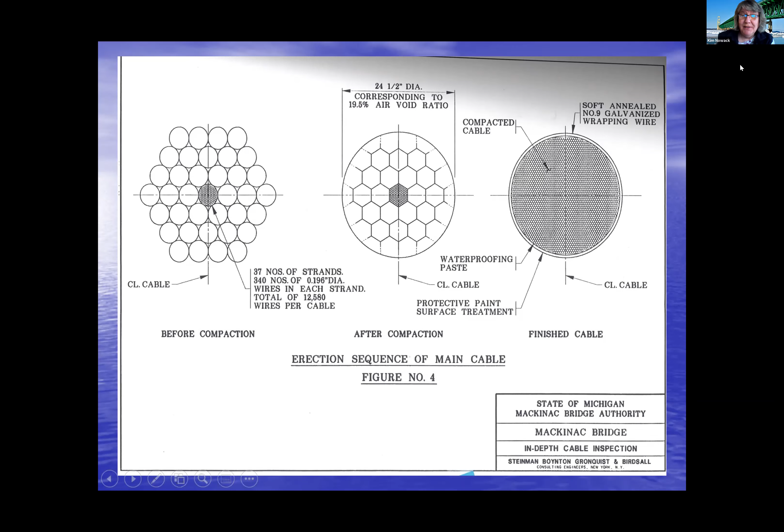I'll show you how the main cable system is constructed there. This is a cross-sectional picture of the main cable. And you can see that it is made of thousands of parallel wires that are put into bundles and then squeezed into a circular shape. So this shows how those bundles were made, and then it was squeezed into a uniform circular shape. So there's 12,580 parallel wires in the main cable that are doing all that heavy lifting of the roadway.

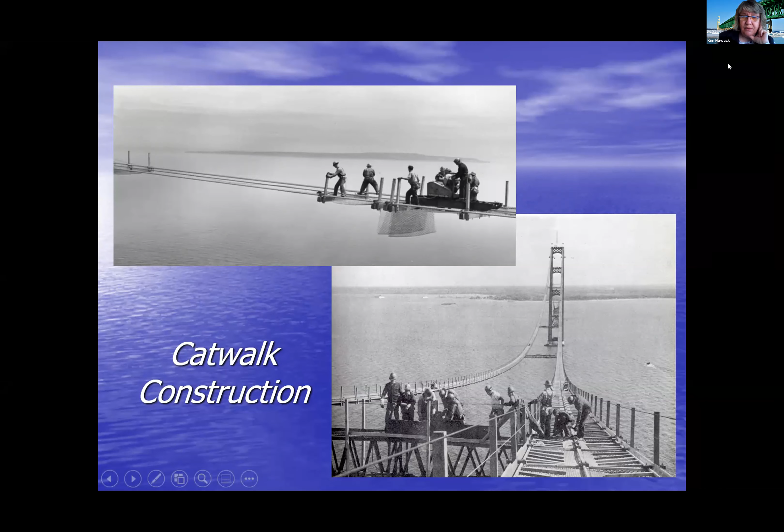And then the other picture shows it already in position, and they're using it. They're walking on the chain link fence. They have some railing erected, trusses side to side, so it helps with swaying, and so they could get from one side to the other without going up and down on the tower. So that's the work platform, getting ready to do the work of spinning the main cable.

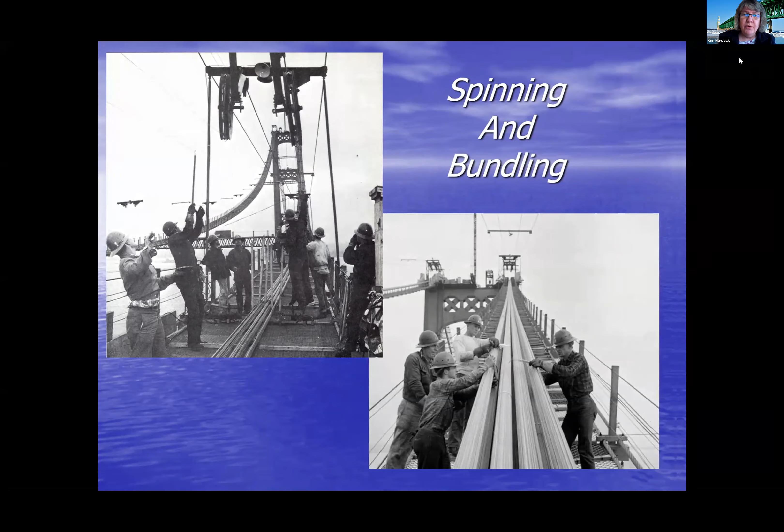And so you can see this gentleman here, he's reaching up to grab that piece of wire that's going past his workstation, and he's going to bring it down into the slots there and start forming the bundles. As you can see in this other picture here, the bundles were then squeezed together to form the uniform cable. And that's what's happening in this picture here.

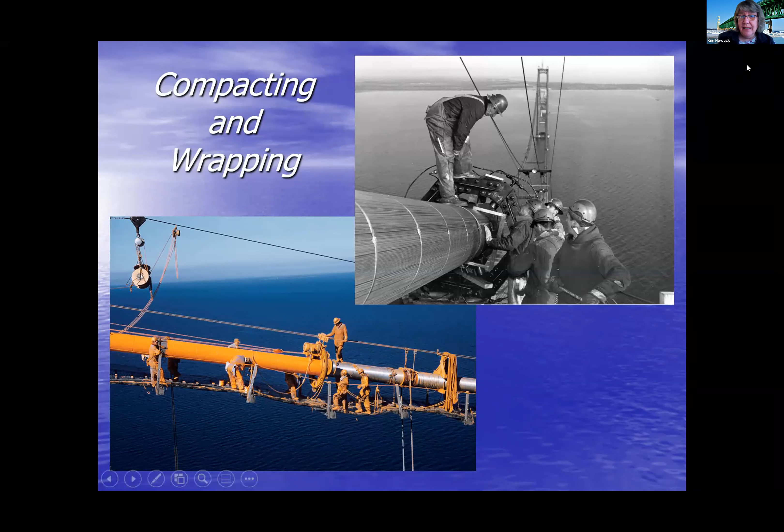But as you can see from those men that are in their blue coveralls that are all orange, they were basically swimming in that lead paste. So there's another thing that was perfectly legal at the time. For safety requirements, nobody really knew about the hazards of lead. So you can see how safety rules have changed a lot in those years.

So I see David Steinman is in the lead here by quite a bit. And so that would be correct. David Steinman was the designer of the Mackinac Bridge. And those of you that are joining us that are already graduated and perhaps have professional engineering licenses, put a PE after your name. You'll be interested to know that David Steinman was instrumental in causing that to happen. He was a firm proponent of licensing for civil engineers in general, and he was the first president of the National Society of Professional Engineers. And so we owe our professional engineering license in part to David Steinman.

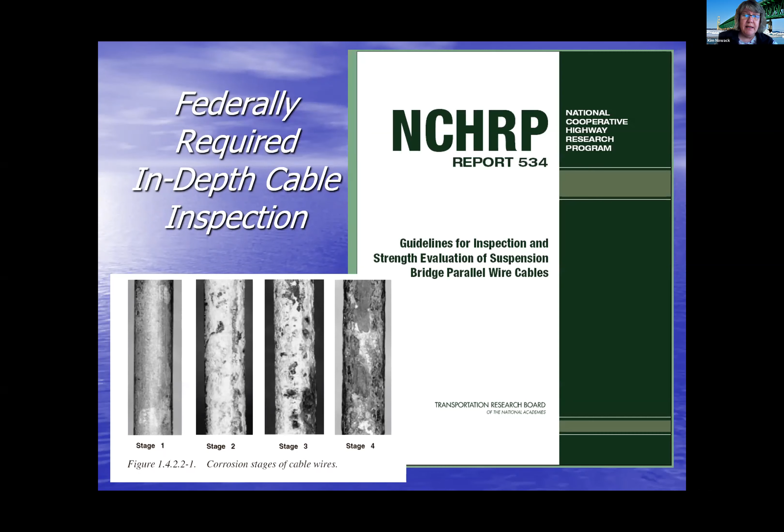So in order to keep the main cable and the suspension system in good condition, we have to do inspections. And so it's a federally required inspection that we do where we test random areas of the main cable. We have to actually open it up and see what's going on the inside. We look at the outside every year, but we have to look at the inside. So we follow this NCHRP report to give us the guidelines for doing the cable inspection. And what we're looking for basically is the stages of corrosion that the wires might be exhibiting in there. So you see the 4 different stages of corrosion that we're looking for when we open it up.

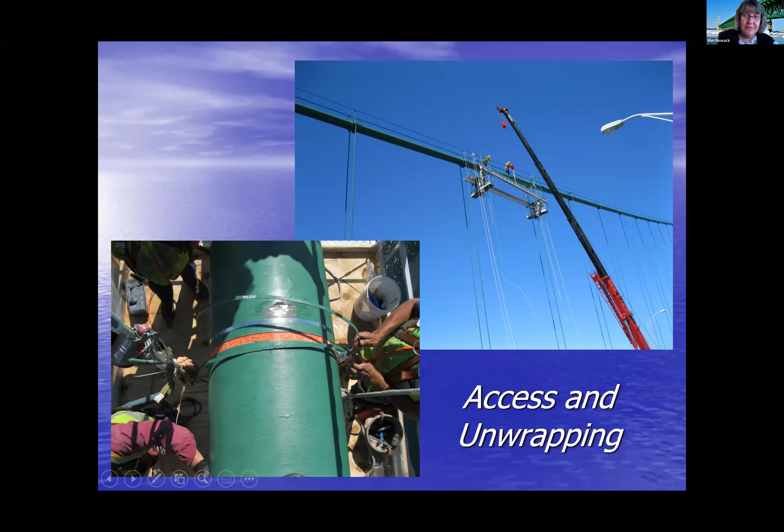So we have to take that wrapping wire off of there, and that's what they're doing in the other picture here. They've soldered some pieces together so it doesn't just uncoil on them, and they're starting to take the wrapping wire off, and there is that orange paste right underneath there, right where we left it 60 some years ago. So once we get it unwrapped, we have to look to the very center of the main cable.

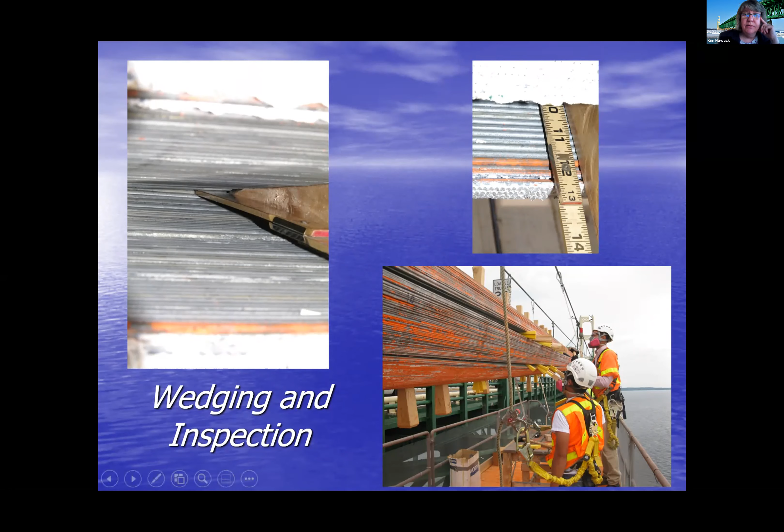This is typically what we see inside there, nice bright shiny wires, a little bit of corrosion on the very outer wires, but all in all, we've always seen very good results inside. And then we have to put it back together the same way they did 60 some years ago.

And then we put wrapping wire back on, and we may want to use the lead paste because it does such a good job, but for environment and health hazards, we don't want to use it. So we use a paste now that has zinc in it. So that does the same thing that the lead did in the corrosion process, and keeps the main wires from corroding, because those are the ones that are doing all the heavy lifting.

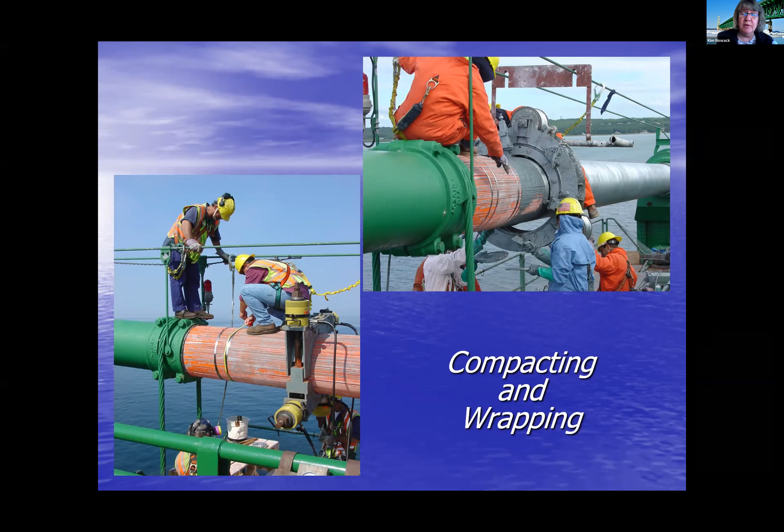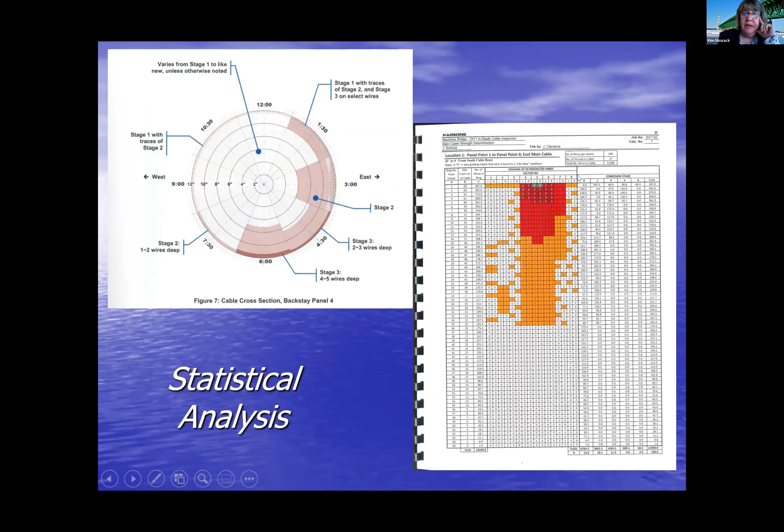And then this is a different way of looking at it. You have each of the rings of the cable laid out there, and the different levels of corrosion are shown in there so that they can take that and they can do a lot of mathematical gymnastics there in order to get the results, along with some wire testing. I didn't mention the wire testing.

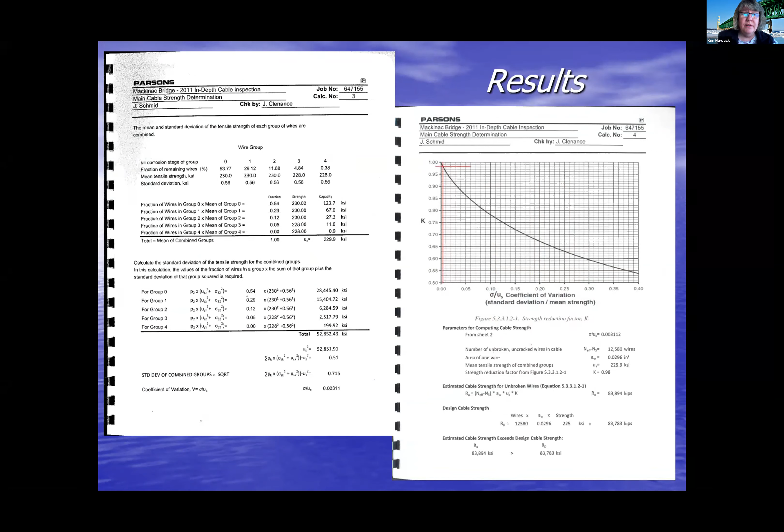They actually take out a piece of wire from the main cable so that they can test what the actual tensile strength is at the time. And so using those numbers, they end up with results that typically show that our cable strength exceeds the design cable strength. And so we have been very happy with our results from the main cable inspections.

We'll have some more coming up in future years as federal guidelines change and as we need to keep up with those inspections. So this talk about main cable inspection can usually take an hour, but I crammed it down into my 10-minute allotment here.

All right, thank you, Kim. I'm just so excited to be able to present with Kim. You know, I've got literally a Wonder Woman poster, and I got the Kim Nowack superhero poster. She's just been such a role model for me as a woman civil engineer, and I'm just super grateful anytime I get to spend time with her. So thanks, Kim. It's always such a hard act to follow. How come I always have to present after you?

First of all, I just want to say, again, my name is Amy, and I perform bridge safety inspections to ensure the safety of the public. So, you know, you should never question the safety of a bridge when you cross it, including the Mackinac Bridge.

You know, it's inspected routinely, both above and below water, by qualified civil engineers and qualified divers. So let's dive right into a very critical component of the Mackinac Bridge, and that's the foundation. Many people never even think about the piers when they drive over a bridge, with the exception of the tower piers. The rest of the piers are out of sight. If, however, you've been lucky enough to travel to Mackinac Island by ferry, you can look to your left or your right and see the elevation of the bridge and all the quantity of the piers

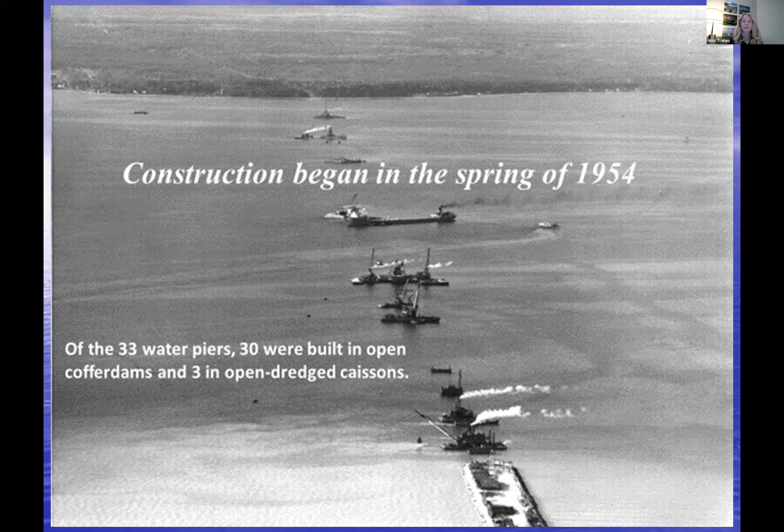that actually support the Mackinac Bridge. Specifically, there's 33 water piers, 30 of which were built in open cofferdams, and 3 were built in dredged caissons. This black and white slide shows the beginning of construction, and it all starts with the bottom and goes up, right? Foundation started in the spring of 1954. Of the 33 piers, the most recognizable and most photogenic are the two tower piers, and that's what I'm going to talk about this evening. The tower piers soar to a height of 550 feet above the water surface, and they plunge down at least 140 feet to the strait's bottom.

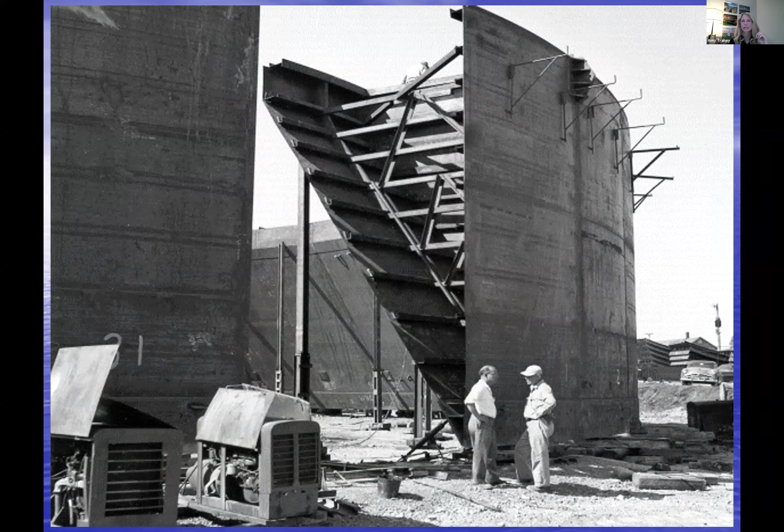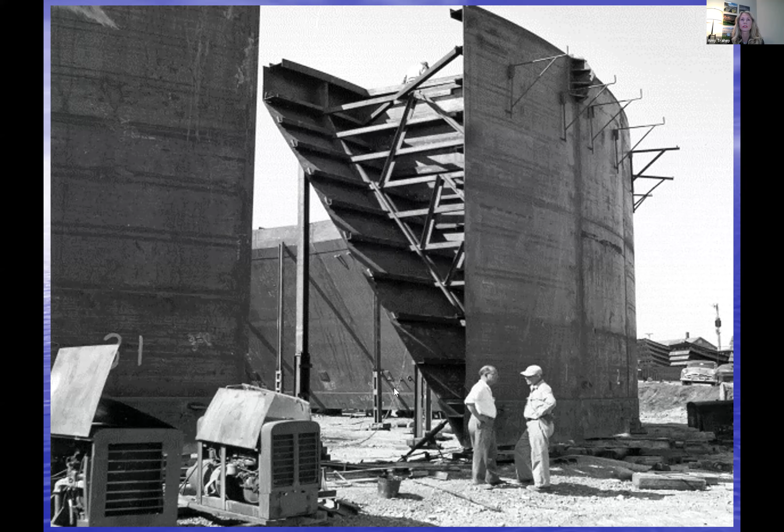This slide shows an aerial view of the overall construction of the caisson at the bridge site. The caissons were assembled near Alpena and barged to the construction site. They were lowered into the Straits section by section and welded together. The inside of the caisson was then dredged in preparation for placement of construction materials, such as the aggregate and the grout. The aggregates came from just up the St. Mary's River, from Drummond Island, and they were crushed, screened and washed several times to remove all the fine dust particles. They were barged here on self-unloading boats to be placed inside the caissons.

Prior to dumping the aggregates, vertical grout pipes were installed from the surface all the way down to the bottom. After the aggregate was placed in lifts around 10 feet deep, the grout was pumped down the pipes, forcing water out of the aggregates and turning the material into concrete. The grout pipes were then pulled up, more aggregate was added, and the process continued until the foundation reached the surface.

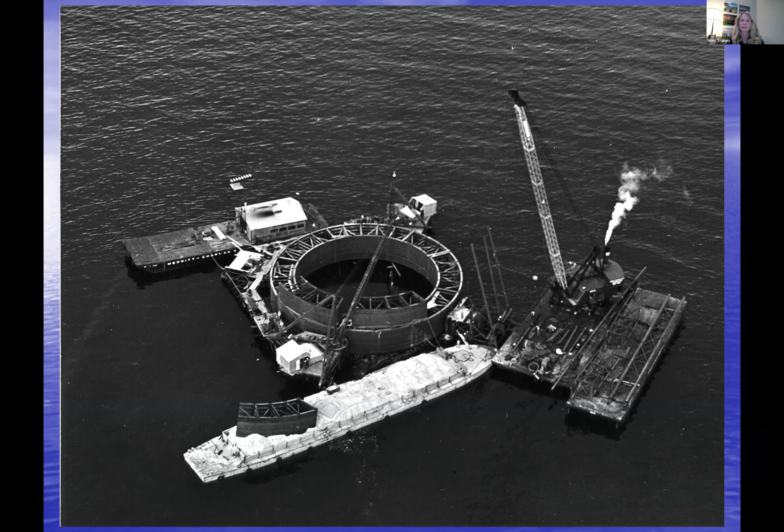I love this picture; this was before the piers were recently painted, so the tower piers look a little snazzier now. But history recalls so many tremendous obstacles and doubts that a bridge could ever be built over the Mackinac Straits, a 5-mile stretch of turbulent water that connects 2 of our Great Lakes and separates 2 parts of Michigan. It was thought to be impossible due to the underwater terrain, the currents, the high winds, the harsh winters, and the ice. This slide really shows those extremes, most prevalently ice.

As the poll question indicated, Dr. Steinman, the chief design engineer for the bridge, along with W.O. Fremont, who I believe worked for the Department of Transportation, made several design assumptions to account for ice pressure on these piers. For the design, they assumed an ice pressure 5 times greater than the maximum ever recorded. The bottom of the foundation is designed to support the bridge and resist the ice pressure. The part that protrudes above the water is minimized to reduce the surface area that the ice can act upon.

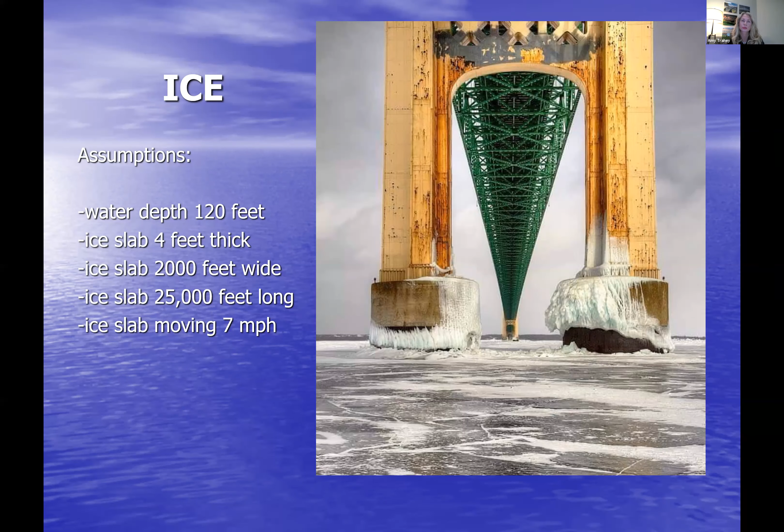So talking a little bit about the underwater construction, these underwater construction methods were a critical component of building the bridge, especially considering the harsh environments and the depths of the water across the straits. Divers were used to do so many different things, from bolting steel cofferdam frames together. They welded those caisson sections together, verified placement of materials. They placed those grout pipes, just so many things that are difficult enough to perform on level ground, only made more challenging by doing it underwater.

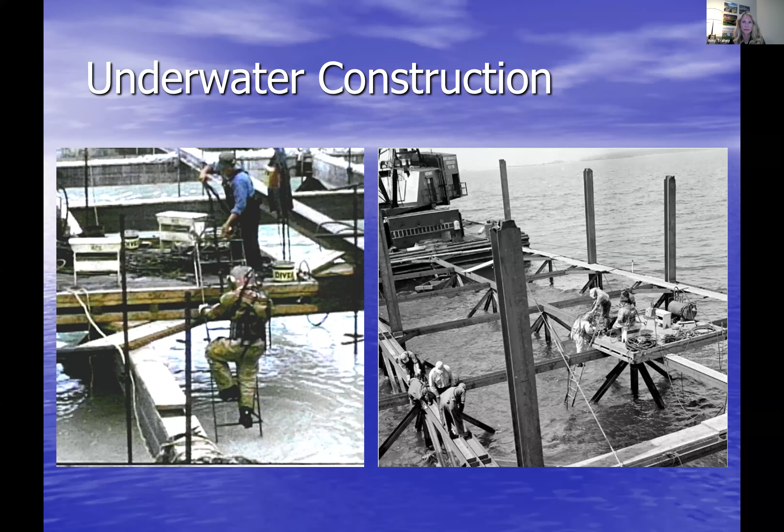Okay, here's the trivia, the poll time. What is the most common cause of bridge failure? A, poor construction. B, scour. C, age. D, steel fatigue. Oh boy, it's all over. That's okay, because after this, everyone's going to know the answer.

Okay, it looks like steel fatigue is coming in strong at 46%, which is probably the first thing people think about, I-35. There's a lot of different steel structures that have failed, but the answer for our poll here, steel fatigue... Okay, the answer is actually scour. Highway bridge failures caused by scour and stream instability account for most bridge failures in the United States.

So what is scour? Simply put, in engineering terms, it's when soil or streambed material around a foundation is removed by erosion. When fast moving current comes around a bridge pier, the sediment from around the foundation leaves behind these huge scour holes. And those holes can turn huge and deep, undermining the integrity of the foundation. One of the more well-known examples of failure due to scour is the bridge collapse of I-90 over the Schoharie Creek in New York, and 10 people lost their lives in that collapse.

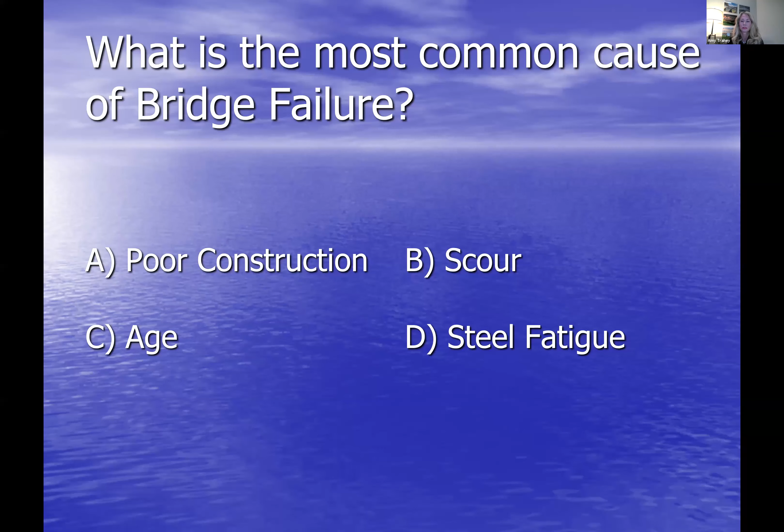So this is very depressing. I swear I'll uplift it a little bit. I'm not sure. There we go.